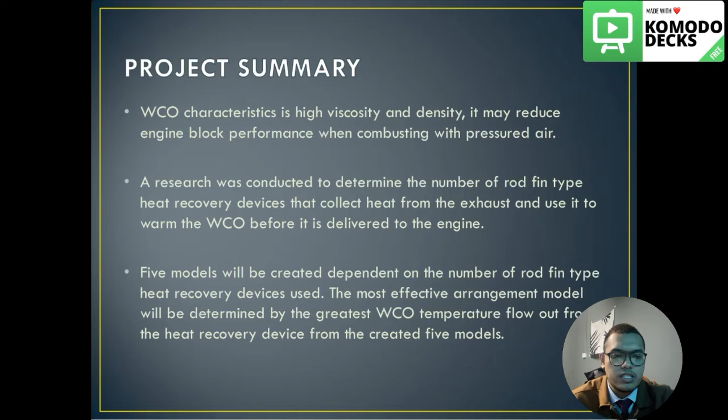Introduction. Energy is one of the most important resources to humankind. Globally, there is surging demand for energy sources due to the intense growth of human population. The depletion of fossil fuel has become a global concern. Therefore, biodiesel has grown more intriguing to many academics due to its biodegradability and sustainability as an alternative fuel.

Due to the environmental effect of petroleum-fueled diesel engines and the diminishing petroleum resources, biodiesel has emerged as a possible alternative to fossil fuel for diesel engines. Biodiesel can be produced from a renewable domestic resource, for instance waste cooking oil. Biodiesel may reduce both petroleum diesel consumption and diesel engine exhaust emission. It has been suggested as a viable replacement fuel for compression ignition engines.

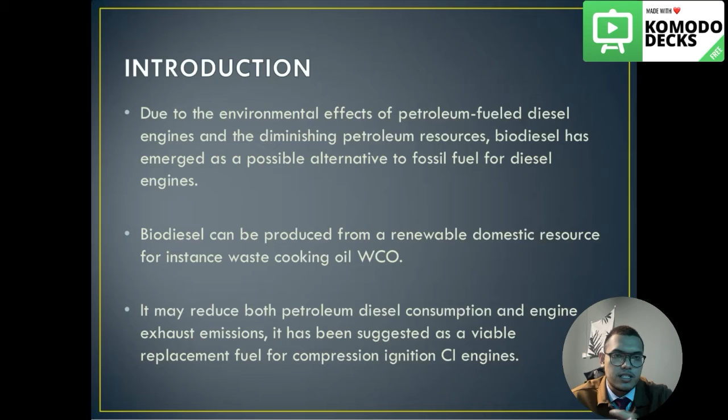Next is biodiesel. Biodiesel is a type of fuel composed of monoalkyl esters of long-chain fatty acids produced from vegetable oils and animal fat. It can be utilized as a partial or whole replacement for fossil diesel fuel in compression ignition engines, for vehicle propulsion or energy generation. Biodiesel is the best candidate for diesel fuel in diesel engines.

Biodiesel burns like petroleum diesel as it involves regulated pollutants. On the other hand, biodiesel probably has better efficiency than gasoline. Biodiesel also exhibits great potential for compression ignition engines. Diesel fuel can also be replaced by biodiesel made from vegetable oils. The use of waste cooking oil as diesel engine fuel offers the benefit of avoiding the energy, time, and expense associated with biodiesel manufacturing.

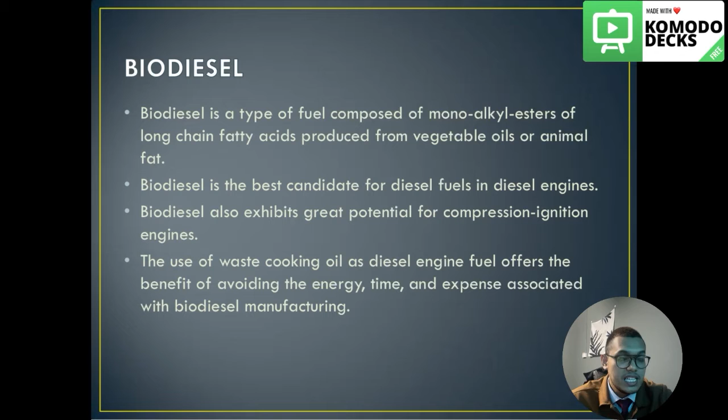Since waste cooking oil has a higher viscosity than mineral diesel, it must be treated to make its combustion characteristic closer to that of mineral diesel. In this study, a heat exchanger was utilized to reduce the viscosity of waste cooking oil by using waste heat from engine exhaust gas. World energy demand continued to rise. The most feasible way to meet this growing demand is by using alternative fuels. One such fuel that exhibits great potential is biofuel, in particular biodiesel.

Heat recovery device. A heat absorption unit, a heat emission unit, and heat pipes comprise the new heat recovery device. A lot of effort has been done to recover the heat from compressors using an oil system, but few research have focused on the housing. The primary benefit of the heat recovery device is that it does not require additional energy consumption because its only driving force is the temperature differential between the compressor shell and the working fluid within the suction line.

Heat exchangers are divided into several kinds based on their application. To choose the best heat transfer heat exchanger out of all the options, various adjustments to the heat exchanger surfaces should be made. The heat exchanger's finned tube is the finest option for extracting heat for the organic Rankine cycle. By using the shell and tube heat exchanger, approximately 10 to 15% of heat is extracted, and the highest feasible quantity of heat extraction is around 3.6 kilowatts at full load.

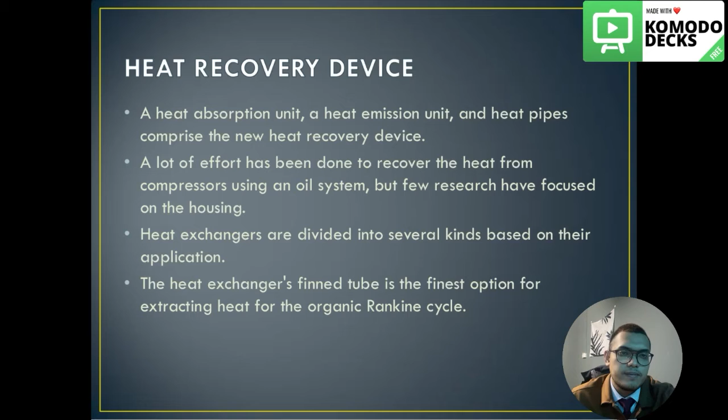Problem identification. Energy is vital, and fossil fuels are one of the most important, but unfortunately, fossil fuels are decreasing. Hence, researchers need to find alternative ways to replace fossil fuels.

WCO, which is waste cooking oil, can be reused and produce energy. However, it has high density and viscosity. Therefore, this study proposed a heat recovery device to reduce viscosity and density in the exhaust system by recovering waste heat due to the high viscosity, high density, and low calorific value of WCO biodiesel.

This study recommends preheating the fuel mixture before sending it to the CI engine by building a heat exchanger to recover waste heat on the exhaust pipeline. The number of rod fins must be considered to increase the heat transfer between the liquid and increase the temperature.

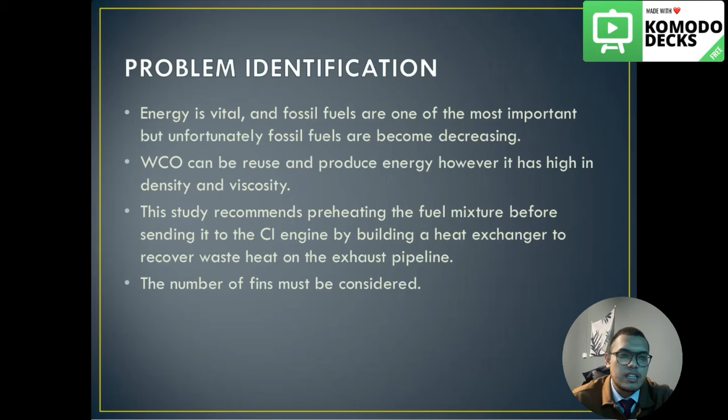My objective for this project is to study the effectiveness of heat recovery device in improvising heat recovery rate by manipulating the number of rod fins.

For my limitation of the project, due to the pandemic issue, the experimental-based investigation cannot be carried out. Thus, the analysis is done by using software simulation. Some of the actual parameters are limited by the software, and the resulting findings will be preserved for future reference.

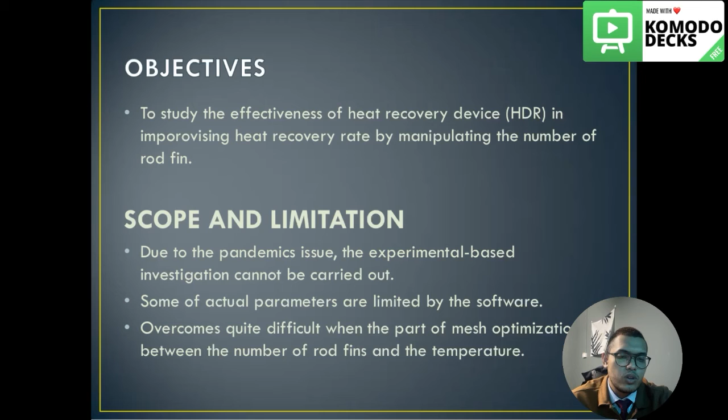Through ANSYS Fluent CFD software analysis, this study overcame quite a difficult part of mesh optimization between the number of rod fins and the temperature.

Methodology. As for the remedy to the stated issue, ANSYS Fluent software was used to compare and monitor the temperature change throughout the HRD with varied numbers of rod fins. The table shown indicates the prior experimental settings and dimensions for the analysis and simulation to achieve comparable outcomes.

HRD, which is 54 mm diameter, exhaust 17 mm diameter, inlet and outlet of HRD 11 mm diameter, inlet and outlet exhaust 16 mm diameter.

The process and method to be employed are critical to achieving the project's goal and obtaining the best outcomes from an experiment-based project. The creation of 5 distinct models is critical since it sets the project's objective.

The methodology's core procedure is focused on model development, designing 5 various numbers of rod fins, analysis, and comparison. The most effective model will be determined based on the greatest WCO temperature flowing out of the heat recovery device from the 5 models developed.